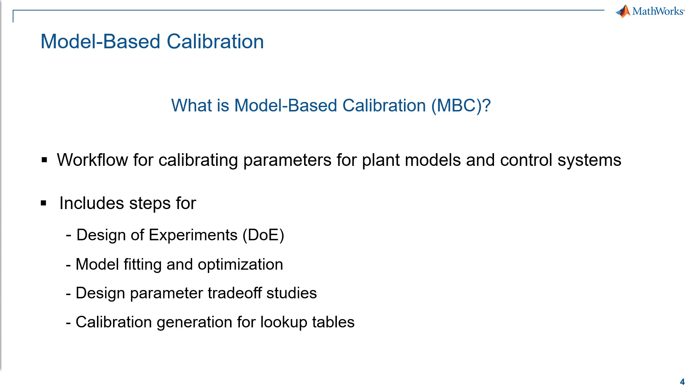For the rest of this video, we'll use the speed-based lookup table calibration as an example and provide a hands-on training to walk you through the entire process. Let's get started.

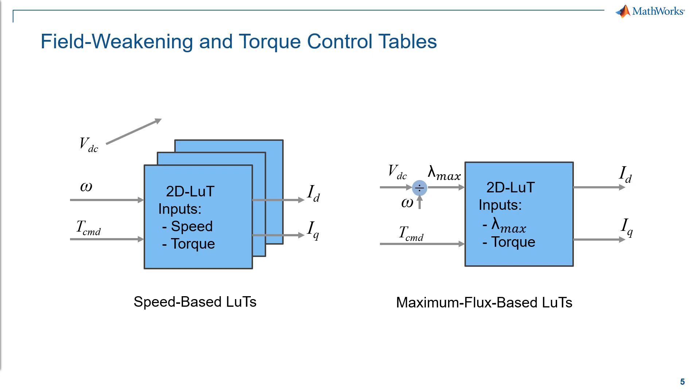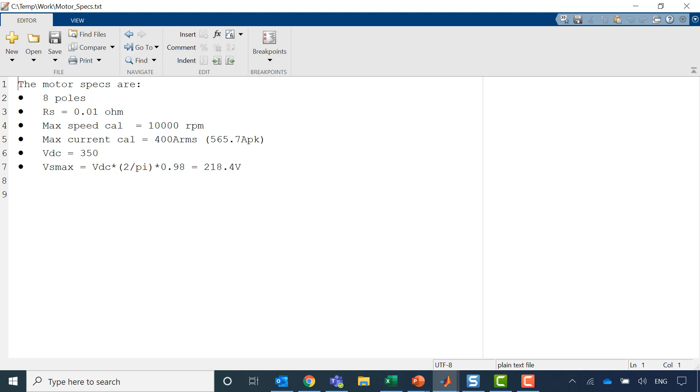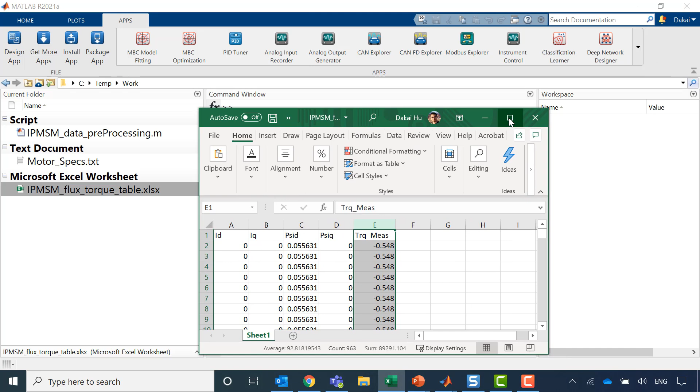We're also going to take a look at the raw data. Here in this case, the DOE is already done and the tests are also done. The raw table that you're looking at is basically the test data. So we have ID and IQ, corresponding flux D and flux Q. And the last column here is the measured torque. The Model-Based Calibration Toolbox doesn't accept the data format like this, so we have to rearrange it to a different format.

What we are doing here is that we are using a simple script to read the raw table, and then we are doing some simple calculation to rearrange the table to a different format. So in the end, what you're looking at is a different table that has 6 columns: torque, ID, IQ, and then speed, and then corresponding modulation voltage, which is calculated by VD and VQ, as well as the maximum current, which is calculated by ID and IQ.

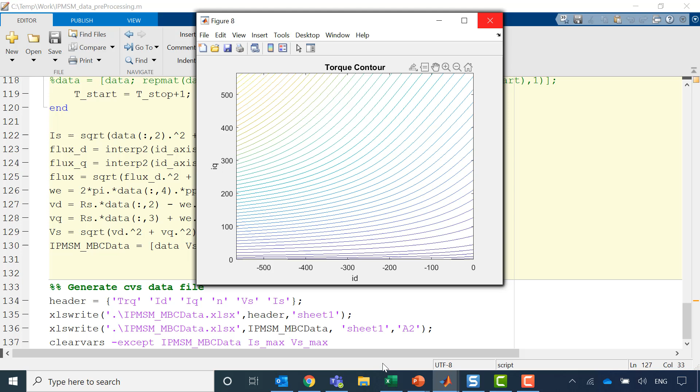So after running this, click run, and this will generate a new Excel spreadsheet called IPMSM_MBC data. Okay, that's the new data sheet generated. So you'll see that here we have 6 columns: torque, ID, IQ, different speed levels, and voltage VS and IS.

So from here, now we are ready to import the data into the Model-Based Calibration Toolbox. Where can you access the Model-Based Calibration Toolbox? If you installed the Model-Based Calibration Toolbox, you can go to Apps and then scroll down here, go to the Automotive section, and you will find 2 apps. One is called Model-Based Calibration Model Fitting, and the other one is called MBC Optimization.

So we are going to use both apps, and we'll first use the MBC Model Fitting tool. So let's launch that. With the MBC Model Fitting tool, the workflow goes from left to right. In our case, since we already have the test data, we are going to skip the design experiment step. I'm going to go directly to the import data step. Before that, let's create a new project. So click New Project. So that's created. And then click Import Data.

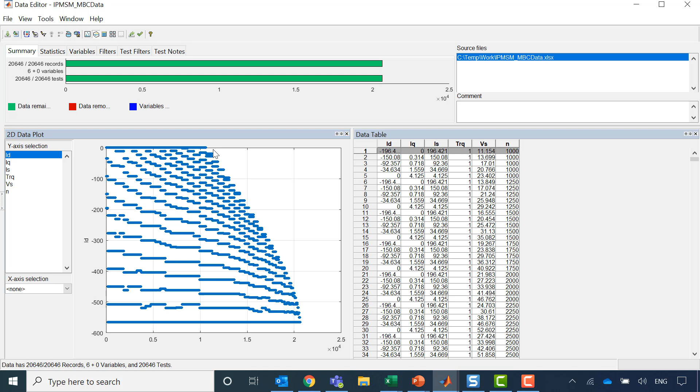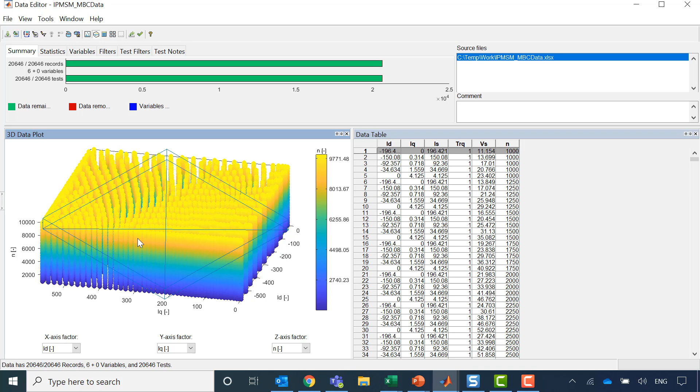So I can look at, for example, ID, IQ, and choose speed as the z-axis. It looks like in our raw data, we have the same kind of data for each speed. We know that certain operating points are not achievable in the raw data. So what we are going to do here is to create a filter or multiple filters to filter out operating points that are not achievable.

To create filters, you can highlight here filters and then right click, add filters. In our case, we know that we have voltage constraints and current constraints. So I'm going to highlight VS, which is the voltage. And then this modulation voltage, we know that it has to be smaller than or equal to the maximum, which is 218.4 volt. So here I am going to add a 20% margin to that, and I'll explain why we need that later if we have time.

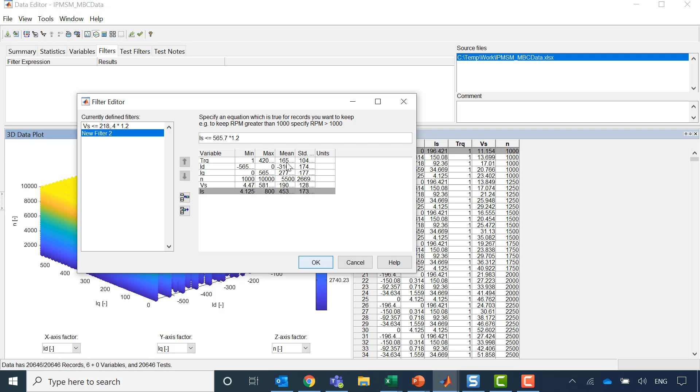The same goes for current. So for current, we need this to be smaller than or equal to the maximum current, which is 400 RMS, and that is 565.7 peak. So times 1.2, again giving it a 20% margin. And click OK. Looks like I've got a typo here. So 218.4. Okay.

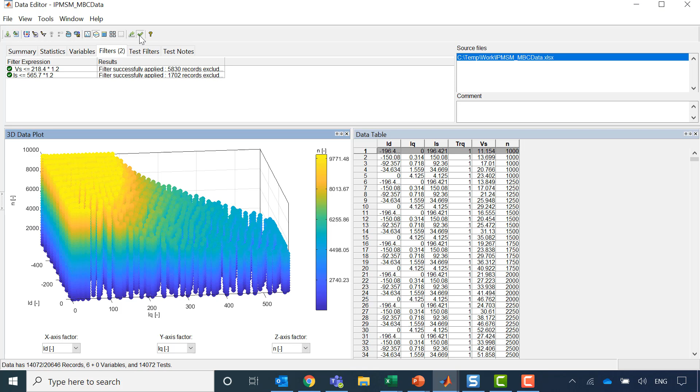Now you'll see that the data looks better. At high speed, the operating areas are smaller than the operating areas at lower speed. This is because at high speed, a lot of the ID, IQ operating points are filtered out because they either violate the voltage constraint or the current constraint. Moving on from here, we can click accept, the check mark here. So the raw data is now imported into the tool. We move on to the next step, which is to fit models.

In our case, we are going to fit the point-by-point model, and the response in this case is IQ and the modulation voltage Vs. The local inputs, we are going to use ID and torque. The operating point is speed. And we're also going to check this box, which is to use default models for large data. In our case, we have more than 10,000 data points even after filtering. So that's a pretty large data file.

Once we check this box, the model fitting process will only fit one kind of model, which in our case is the Gaussian process model, instead of fitting 4 different kinds of models to the data. So from here, we click OK. You will see this window popping up. What this window does is it allows you to group different tests into the same test.

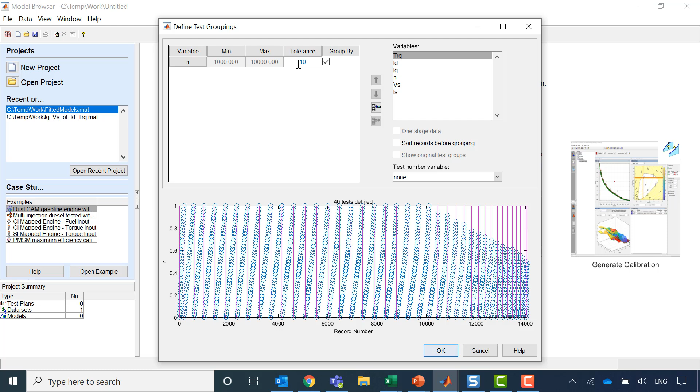For example, if your dyno measures speed around 1000 RPM, and the next set of measurements comes in at 1001, 1003, 1005 RPM, and if you set this tolerance here to be 10, then plus minus 10 RPM will be considered the same RPM testing operating point. So all these 1001, 1003, or 1005 operating points will all be grouped into the 1000 RPM testing point. Okay, so in our case, we choose 10 as the tolerance and then check sort records before grouping.

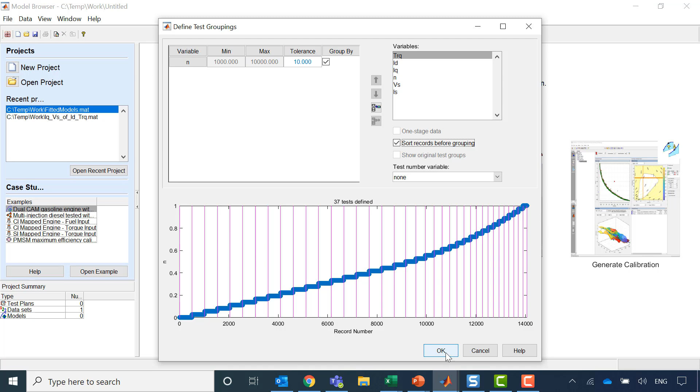In our case, remember we are calibrating from 1000 to 10,000 RPM with increments of 250 RPM. So we ended up with 37 tests or 37 operating points defined according to the speed. Okay. So once we click OK, now the tool will start the model fitting process. And this process will take approximately, in my case, 3 minutes. And this is based on your number of operating points, your number of test points.

So I have over 10,000 test points. And the time it takes to finish the model fitting is in direct proportion to the number of testing points cubed. I have 4 workers on my laptop, and I'm using the Parallel Computing Toolbox, which is utilizing all 4 workers at the same time. And this will take, as I mentioned earlier, about 3 minutes. So in the video, I'm going to speed this up.

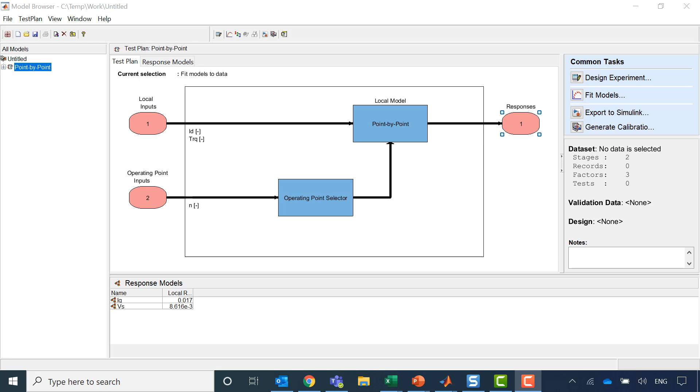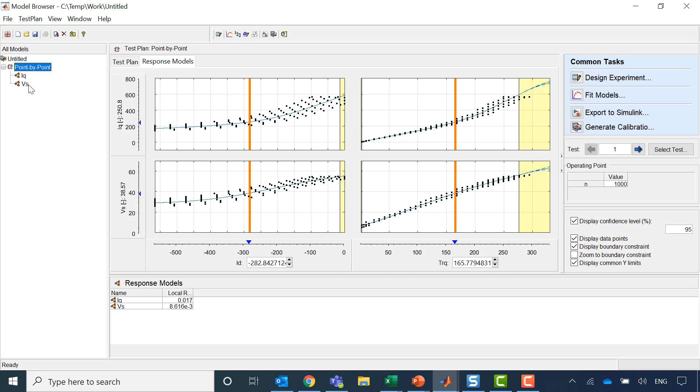Now the model fitting process is finished. Let's take a look at what we get. So here we have 2 responses. One is IQ and one is VS. Click IQ and these are the models. So for each operating point of speed, we end up with one model of IQ, right?

So here if you select test, you will see that different operating points are arranged here, and then we can highlight, for example, at this operating speed, and click OK, and this is the surface of IQ. The same goes for VS, because for each operating point of speed, we have a VS surface. You can also, if you like, right-click and then print to figure, so that you can open up a formal MATLAB figure file to look at the fitted models.

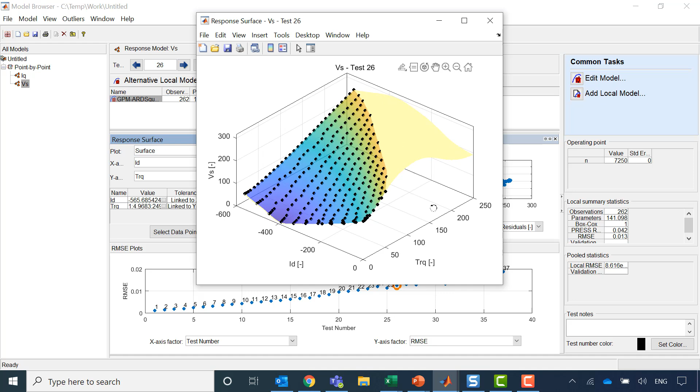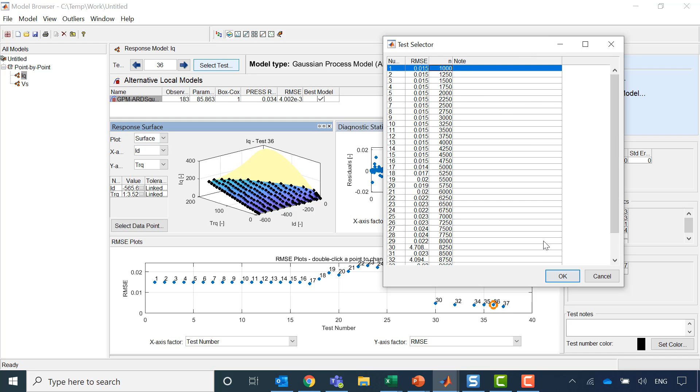Let's also look at an operating point that has high speed. So if I choose a test that has very high speed, let's say 9,750 RPM, and let's choose IQ. You will see that the operating areas are greatly reduced compared with, let's say, a low speed operating point. Select 1000. Right, so you end up with a much smaller operating area on the ID-IQ plane at high speed. This is understandable because at a high speed, your voltage limit ellipse will shrink, and that will limit your variable operating region on the ID-IQ plane.

Okay, we are satisfied with the fitted models. Now let's save them first before we move on to the next step. Just click Save. I'm going to give it a name. Call it Fitted Models. This project will be saved into a .mat file. Okay, looks like now it's saved.

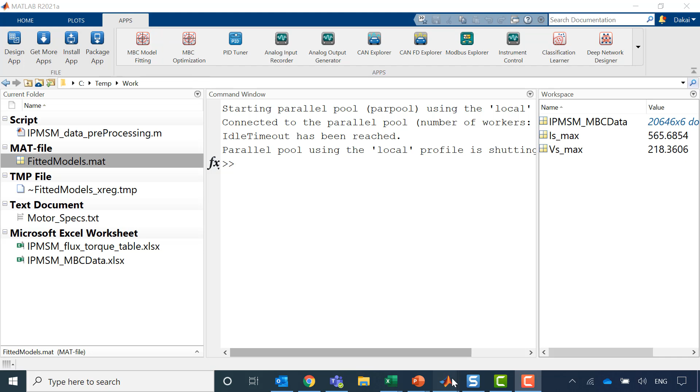Now we are moving on to the MBC optimization. We can open the MBC optimization app from here in the apps section, or we can just go into the model browser that we used to fit the models and go to the top and then open that from here. So generate calibration is essentially bringing up that MBC optimization app. This app is also called CAGE Browser. CAGE stands for Calibration Generation.

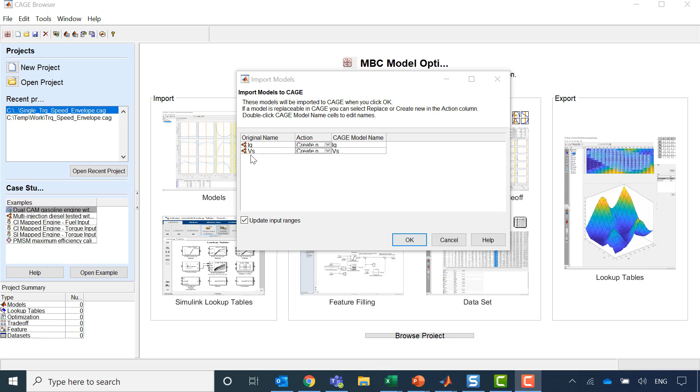Once you're in CAGE, first thing it will ask you to import the models. So in this case, it automatically detects the models fitted from last step, which are the IQ and VS models. So here I'm just gonna click OK, and that will import all the models fitted from the last step. Now you're seeing that the models are inside CAGE.

In this exercise, we're going to do two different types of optimizations. The first one is to calibrate the torque speed envelope under our specified voltage and current constraints. The second optimization is to calibrate the final torque and field weakening control current reference lookup tables for ID and IQ. Let's get started with the first optimization, which is to find the torque speed envelope.

To do that, first we have to create a function model, and this is for current IS. So remember we had IS previously in the raw data, but in this exercise we didn't fit an IS model. We didn't have to because we can easily calculate IS from ID and IQ. So in this case, we're going to do that. IS equals square root of ID squared plus IQ squared. Next, and finish.

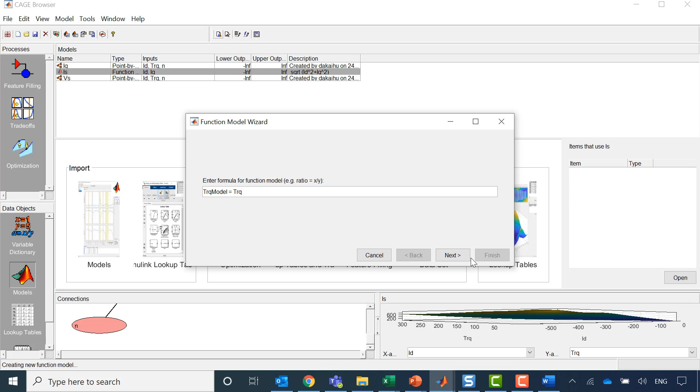We also need to create another function model called torque model. So I'll give it name torque model, and this will simply equal torque. The reason why we need a torque model is because we need a model so that we can run optimization to either maximize or minimize. In this case, we're going to maximize torque model at each operating point of speed. So the maximum torque operating points at each speed point will constitute the final torque speed envelope. Click next, and okay, assign the input automatically assigns the original torque as the input, and we're going to click finish.

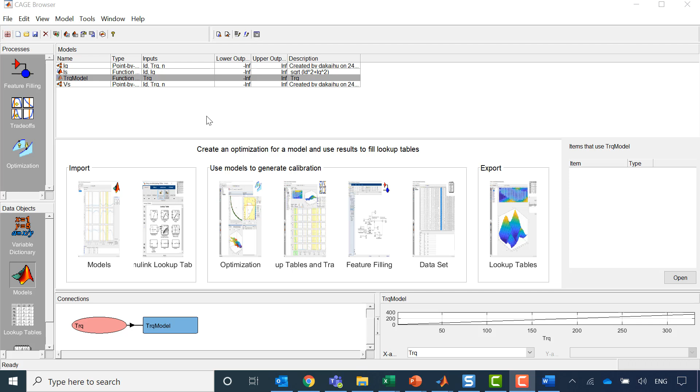After creating the two function models, before we can create an optimization, first we need to create a table that contains all the optimization points. So we're going to go to File, New, 1D lookup table, and I'm going to call it torque envelope table. Select speed. Speed is the table operating points. And we're going to go from 1,000 to 10,000. In this case, remember initially when we grouped the tests, we have 37 tests. So just put 37 here.

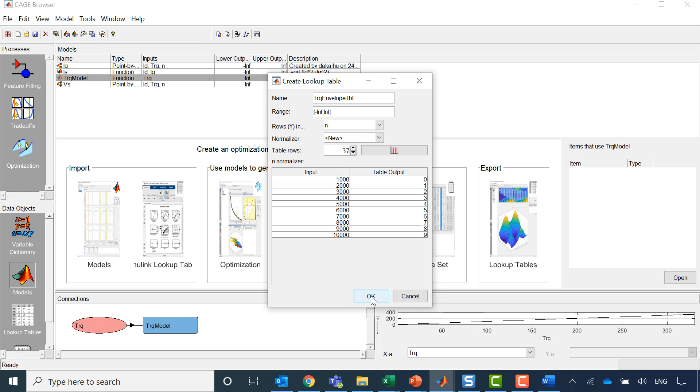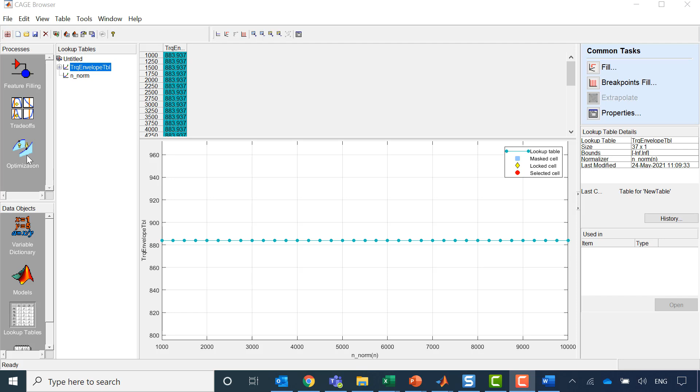These are the operating points that will hold the final optimization results. We're starting at 1000 RPM and it goes all the way to 10,000 RPM at increments of 250 RPM. Now we have prepared everything. We're just going to go to optimization and then from here create an optimization. In this optimization, we're going to maximize torque model. So highlight torque model, click next, and then select here maximize.

You can choose different algorithms for your optimization. In our case, the default is fmincon, which is the most commonly used local optimizer. And for certain cases, you can choose to use a global optimizer if you have installed the Global Optimization Toolbox. Things like pattern search or genetic algorithm. Okay, now we can click finish.

At this page, we work from top to bottom. On the top here, the objective is already set up, so we're trying to maximize torque model. And then we also need to tell the optimizer what the constraints are. In our case, we have two constraints, current and voltage.

So the current has to be smaller than or equal to 565.7 ampere. This is the peak phase current. Click OK. And the voltage has to be smaller than or equal to 218.4 volt. This is the phase modulation voltage.

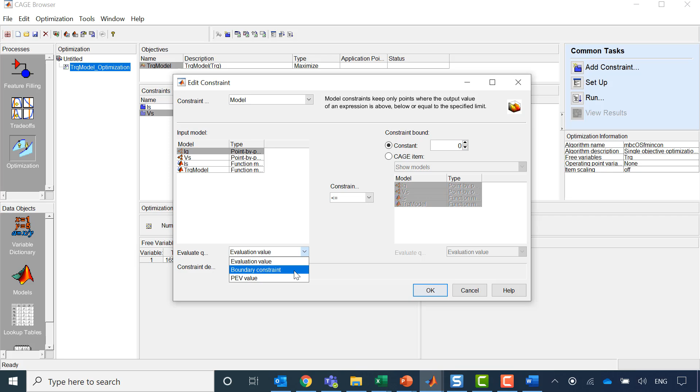What we also need is to add a boundary model. Remember when we create the models, we have the IQ model and the VS model. We have to select either one and then choose the boundary constraint, because if we don't select the model boundary as a boundary constraint, then the optimizers may search areas that fall outside of the model boundary.

Now we have set up all the constraints, and the last thing we have to do before we run the optimization is to set up the free variables and fixed variables. The fixed variables are essentially the speed operating points, and the free variables are ID and torque.

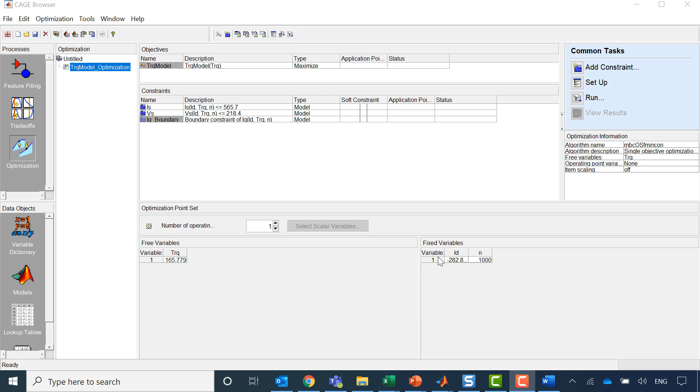What we can do is go to optimization and click select variable or select free variables, and select torque and ID as the free variables, and leave the speed blank, so that speed will be automatically selected as the fixed variable.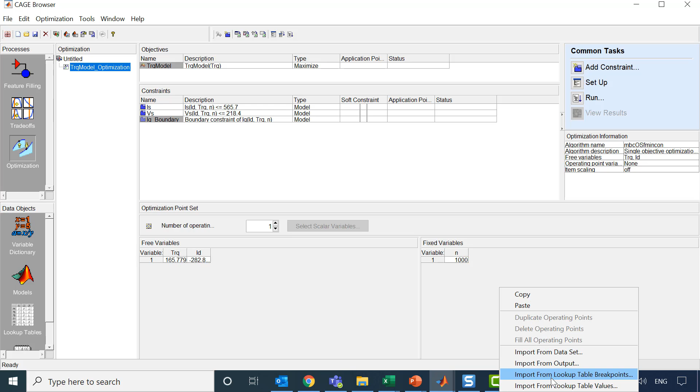By default, there's only one operating point. We need to import all the operating points we want to run for optimization. So we have to right click and select import from lookup table breakpoints, and select the torque envelope table, which has 37 operating points of speed. Now the 37 operating points are imported here.

From now on, what we need to do is simply click a button, run, and that will kick off the optimizer, and the optimizer will search on the response surface, trying to find what the maximum torque is at each operating point.

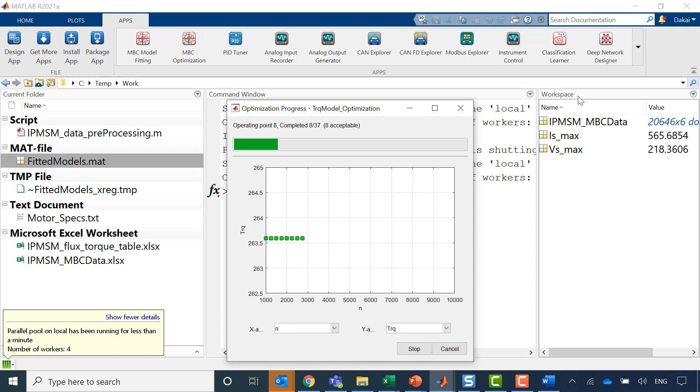Again, here I'm relying on the parallel computing toolbox, and I'm not speeding up the video, because this process is relatively fast. It takes less than 1 minute to finish the entire optimization. Looks like now it's done.

Okay, so this is the final optimization results. I can obviously pop it up to a formal MATLAB figure. And then this is the torque speed envelope that we optimized.

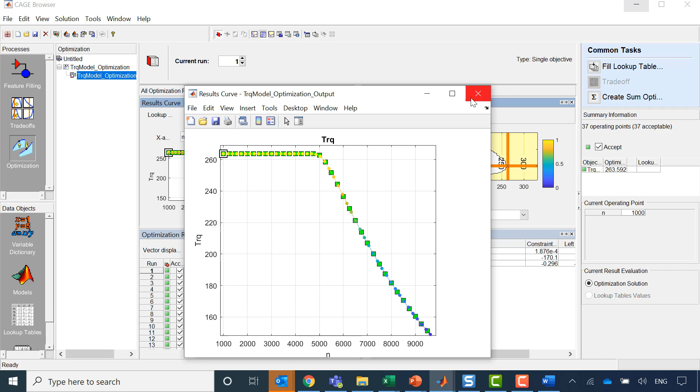And then from here, we need to fill these optimization results to the tables that we created. Well, one table only, right? The torque envelope table. So we click fill lookup table and highlight the torque envelope table we just created, and then fill that with the optimization results.

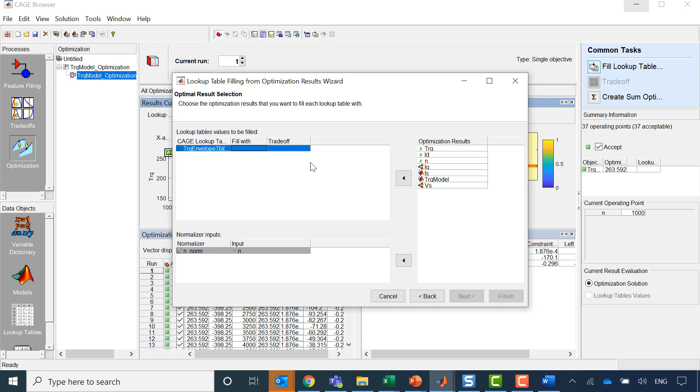Click next. And there are different filling methods. In our case, direct fill, right? There's no extrapolation or interpolation going on. So this is the final table that we are looking for.

We are now done with the first task. Let's move on to the second task, which is to create an optimization to get torque and field weakening control IDIQ lookup tables. We'll have to rely on this torque and speed envelope to create the torque grid used for generating the final lookup tables.

Because in this exercise, we want to use the percentage of maximum torque instead of absolute torque values for the lookup tables.

To do that, we have to first create a torque envelope model, which is essentially a math expression of this torque speed envelope. So let's go to Tables and click Convert to Model.

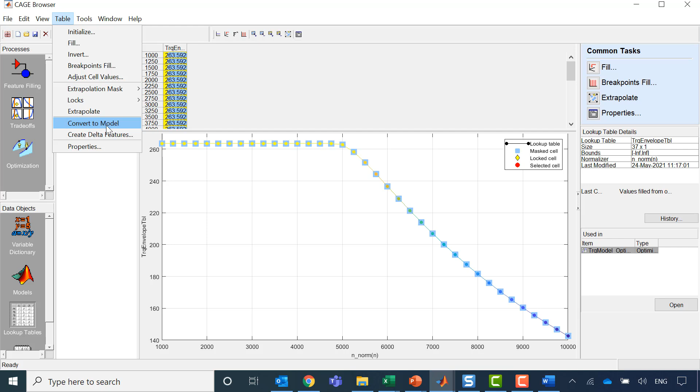Click OK. Actually, we can name it instead of the original torque envelope table, we can change the name here. Just call it torque envelope. Click OK. Now you'll see under the function model section, there's a model called torque envelope being created.

You can actually see what the model looks like in the lower right corner here.

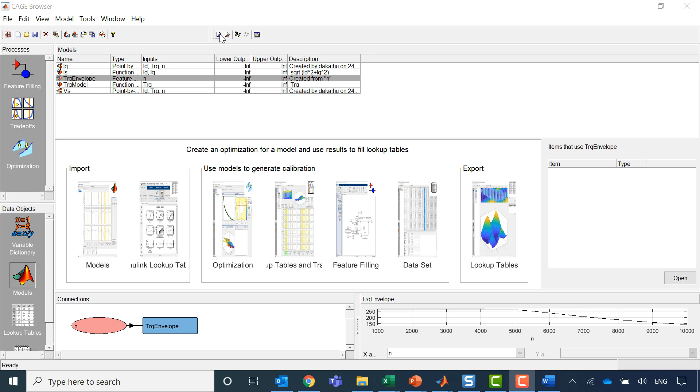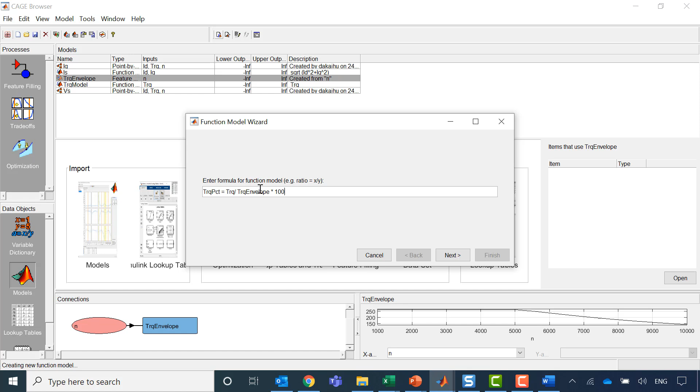Once we have the torque envelope model, the next step is to create another function model named torque percent. Click new function model and type torque percent. This function model is calculated by the original torque from the raw data, divided by this torque envelope table or model, and then times 100. Click finish.

With this new function model called torque percent, now let's create a table based on this torque percentage. So we can go to Tools, create lookup tables from a model, then click Next.

Here we have to select speed as the row input and torque percent as the column input. For the speed, the normalizer is the norm speed, which we created earlier, starting from 1,000 all the way to 10,000 RPM with increments of 250 RPM.

For the torque percentage, we have to create our own grid. In this case, click this button, and we're going to use a freeform vector starting with 1%, then 4% with increments of 4, all the way to 100% of maximum torque.

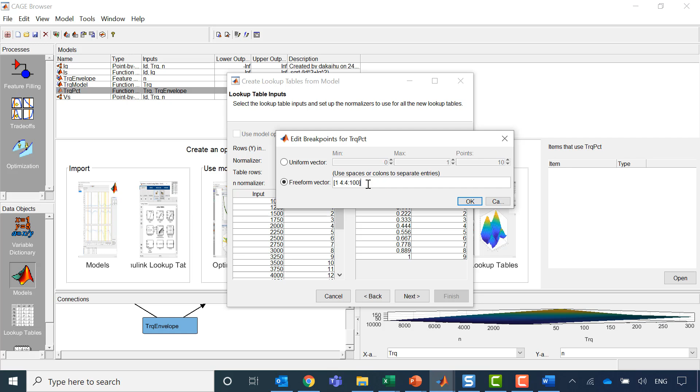The reason we don't want to start from 0% is because when the torque is 0, there's no way the optimizer will be able to find a single operating point that can satisfy this objective to achieve maximum efficiency or TPA, which we'll explain later. Therefore, instead of using 0, we use 1% of the maximum achievable torque.

Click OK, and click Next. Now the table is created.

Now let's go back to the Model tab. We still have to create another function model named torque grid. Torque grid is the absolute torque calculated by torque percentage and the torque envelope.

Let's go ahead and create a new function model and type torque grid equals torque percent underscore input. This is an automatically created variable once we create the torque percent. Torque percent underscore input is essentially a number from 1 to 100 that represents the percentage of maximum torque. So torque percent underscore input divided by 100 gives us the actual percentage, and then times the torque envelope.

So this is the torque grid. Click Finish.

From here, we have done all the preparation work. We created all the variables needed and all the function models needed. Now the last thing we need to create is called TPA, torque per ampere, used as the surrogate to indicate efficiency. TPA is calculated as torque divided by current.

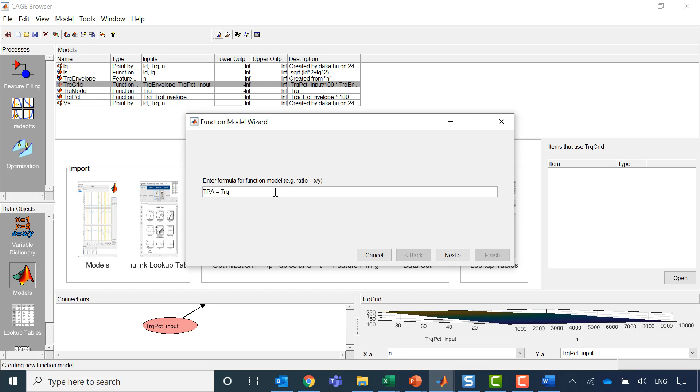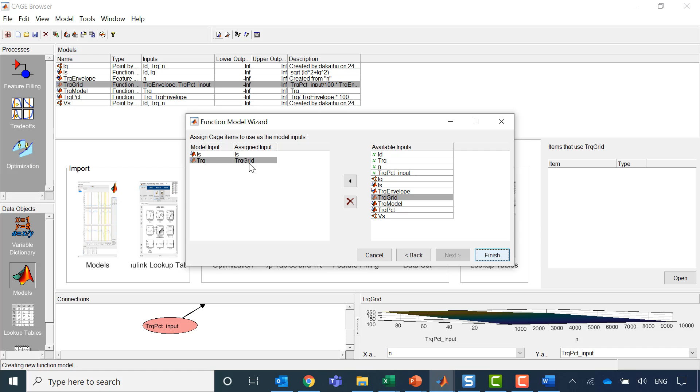Here, torque is actually indicated by torque grid, because torque grid is calculated by the absolute torque percentage times the torque envelope. That's why we replace the original torque with the torque grid here.

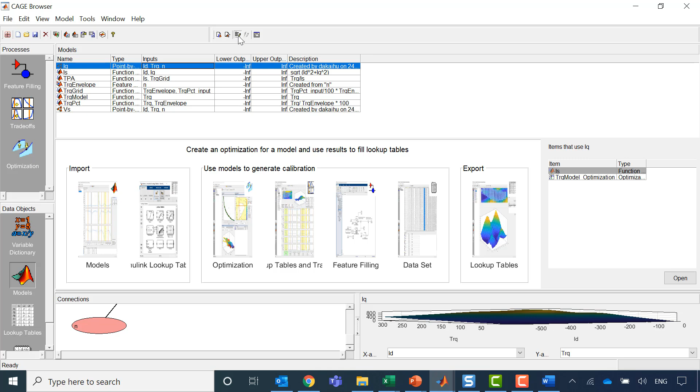What we also have to do is replace the torque inputs for the original IQ model as well as the original VS model with torque grid, the function model we created. So here we highlight IQ and click Edit Inputs, then highlight the torque and use torque grid to replace that. We do the same thing with the VS: Edit Inputs and replace with torque grid.

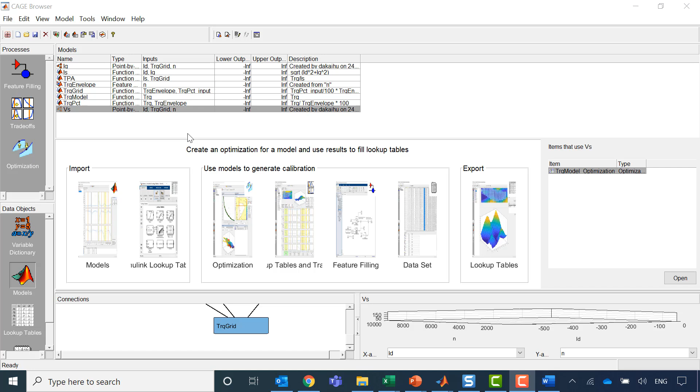Finally, the last thing we have to do before creating the optimization is to create the ID IQ lookup tables that are used to contain the optimized table data. To do that, we highlight IQ and go to Tools and select Create Lookup Tables from Model, and click Next. Here, obviously, the speed is used as rows and torque percentage is used as the columns.

So here select speed norm and torque percent norm. You can see the grids for speed, the same one as before, from 1,000 to 10,000, increments of 250. And for the torque percentage, from 1% all the way to 100%, increments starting from the second, increments of 4.

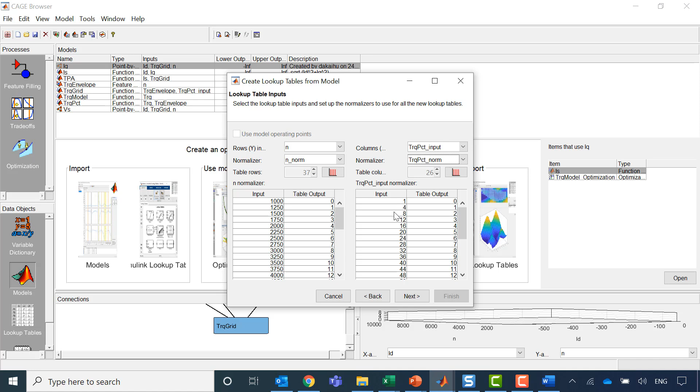Click Next. Create lookup tables for ID and IQ. Click Finish. Now the tables are created.

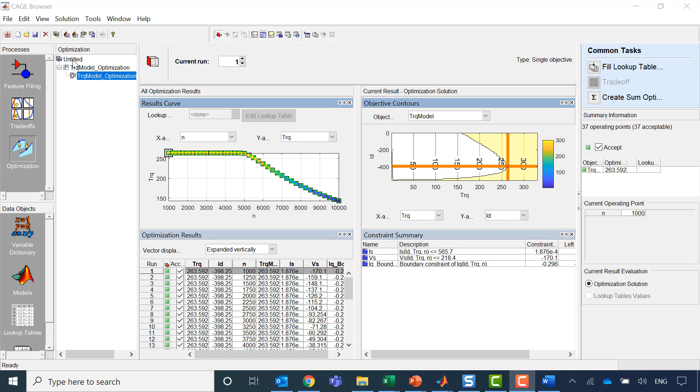Okay, now let's go to optimization. Click here, highlight the original project at the top of the project tree, and then click Create Optimization.

What we're trying to do is maximize the TPA. So highlight TPA, click Next, click Maximize, click Finish. When we are at this page, we're following the same workflow as before, so work from top to bottom.

We already have the objective set up, which is to maximize TPA, and then we're going to add constraints. It comes with the TPA boundary constraints. What we also have to do is create the voltage constraints and the current constraints.

For voltage, the constraint is that this voltage Vs has to be smaller than or equal to 218.4 volts. And then for the current, the constraint is that the current Is has to be smaller than or equal to, I believe, 565.7 ampere. This is the peak one.

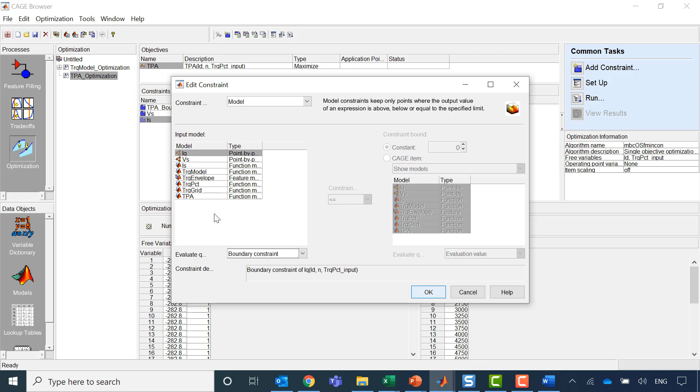What I also want to add is the original boundary of the Iq model. So click Iq, and here we're going to select boundary constraint. Remember, the optimizers cannot go beyond those model boundaries to search for optimized solutions.

Okay, now let's work on the optimization's point set. This is basically your operating points. So we have the torque and speed grid, right? Therefore, the fixed variables are torque percentage and speed.

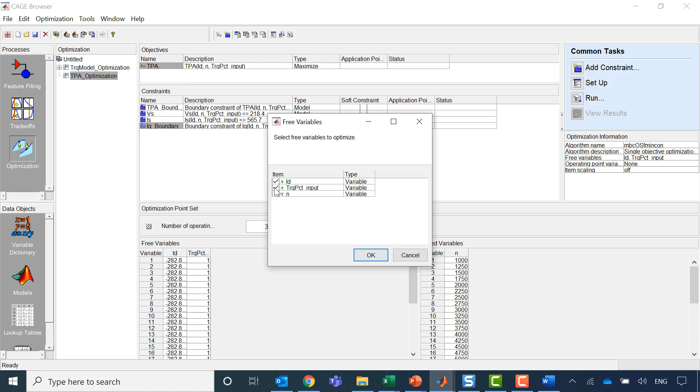And the free variables are basically just Id. So we can go to optimization, select free variables, we select Id, and then automatically the fixed variable here becomes speed and torque percent.

But here is only 37 operating points. We have more than that, right? We have a number of speed operating points times a number of torque operating points. Actually, we have to import that from the tables. Right click here and then click import from lookup table breakpoints. In this case, either Id or Iq table, they're the same.

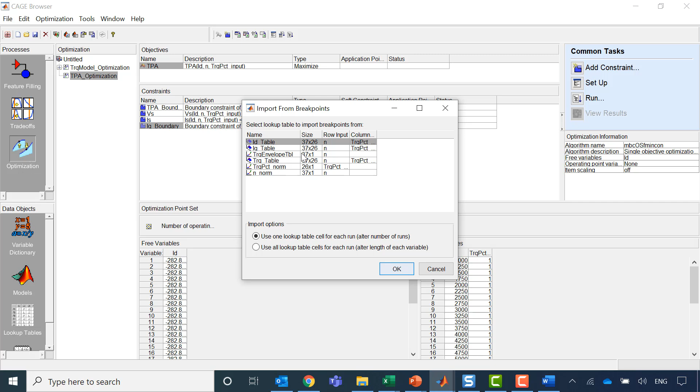So altogether, we should have 37 times 26 operating points or fixed variables. Click OK. Now you'll see the number becomes 962.

At this point, I believe we prepared everything to run this optimization. So all we have to do is go here and click setup. Instead of starting from one point to run the optimizer, what I prefer is to always start from 3 points. This will give us better accuracy.

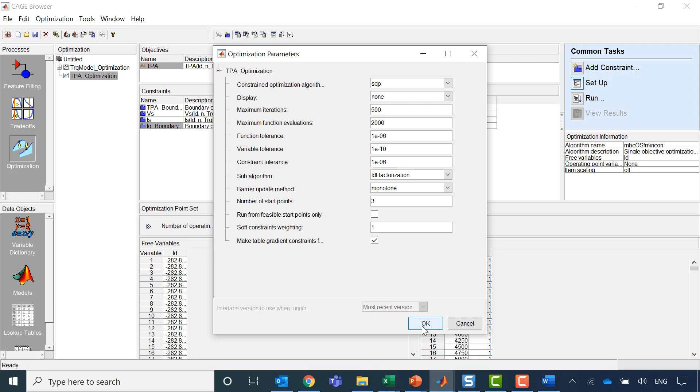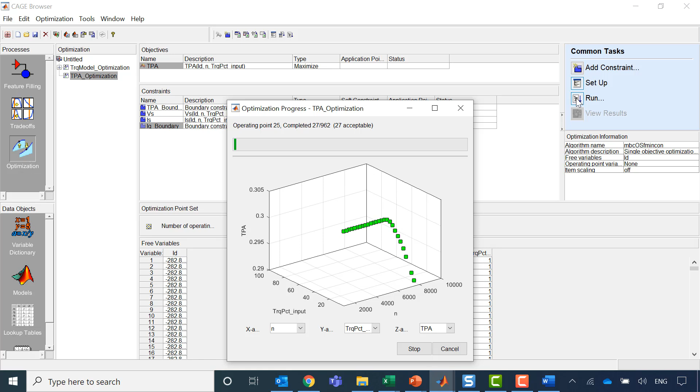So let's click run. Depending on your PC, this process can take somewhere between less than 1 minute to a couple of minutes. In my case, I have 962 operating points and I'm using a four core PC running Parallel Computing Toolbox, and it will take roughly around 3 minutes. So for the sake of this video, I'll just speed up the process here.

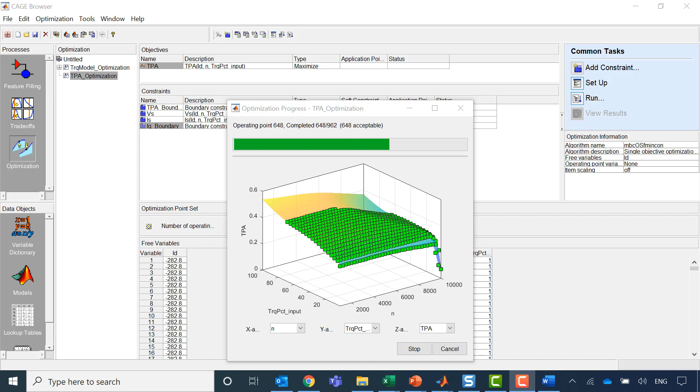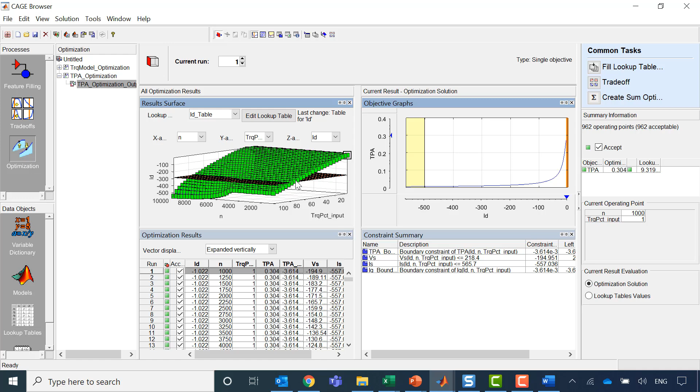Now the process is finished, and you'll see that we have 962 operating points, and we were able to find acceptable solutions for all of them. Each green dot indicates that the optimizer was able to find an optimal solution. We can right click here and print it to a MATLAB figure so you can take a closer look at it.

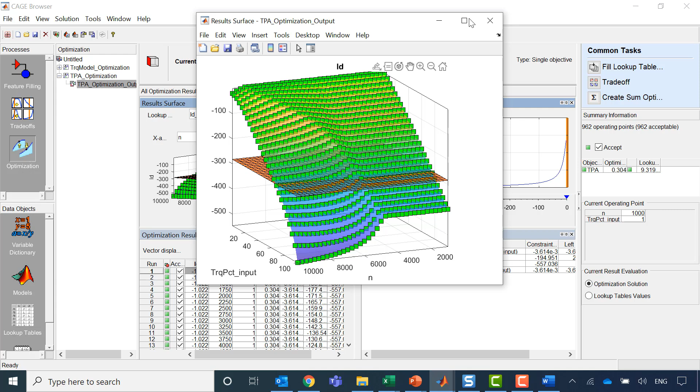Now we have the optimization results. The last step is to fill in the tables we created earlier, the ID and IQ tables. The ID table is already here that you're looking at, and the IQ table we need to fill from here. So ID table, IQ table, click next.

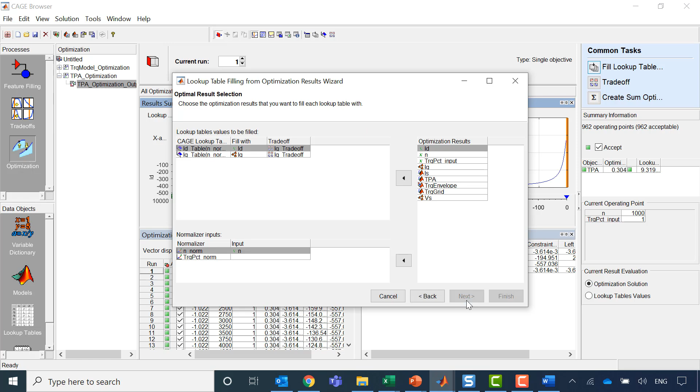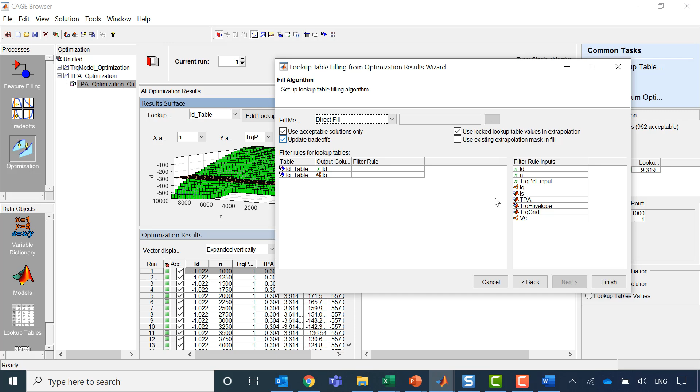Fill with ID IQ, and then the normalizer, which is the inputs for the grid, so speed and torque percent. Click next. In this case, we're still going to use a direct fill because we don't want to extrapolate or interpolate. Click finish.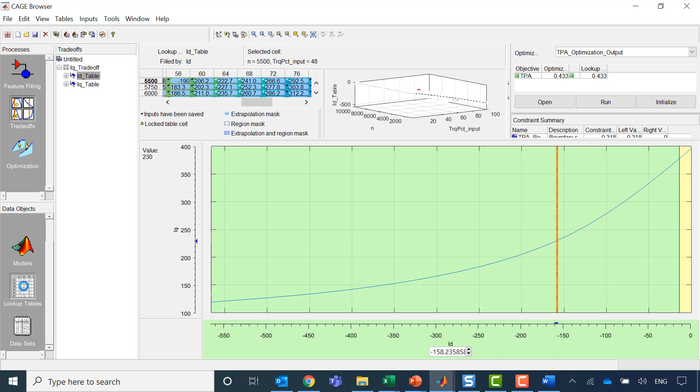You will see the results here under the table section. Right here, click lookup tables, and click—this is the Id table. If I click IQ, this is the IQ table. I can also right click and print to figure.

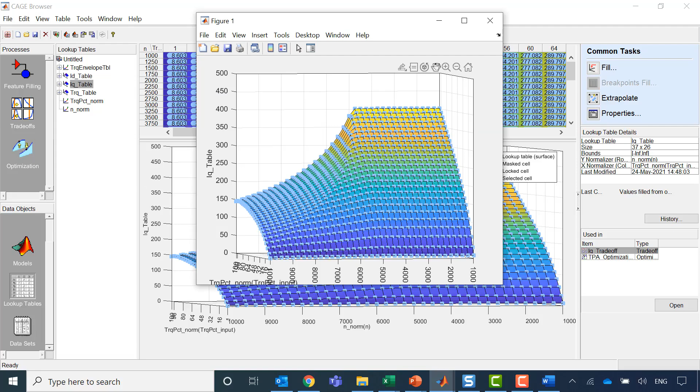As you can see, on the x-axis this is speed, starting from 1,000 to 10,000 with increments of 250. On the y-axis, we have torque percentage, from 1% all the way to 100%. This is based on the torque speed envelope, which means that at 10,000 RPM, that operating point corresponds to a different absolute torque compared to, let's say, 2000 RPM, even though there's 100%. But this 100% is based on the maximum torque achievable at 2000 RPM, and this torque percentage is based on the maximum torque achievable at 10,000 RPM.

So by filling the table in this manner, we make sure that each operating point is viable. There are no operating points wasted. Let's actually take a look at the ID table as well. Click ID, and let's print it to a MATLAB figure.

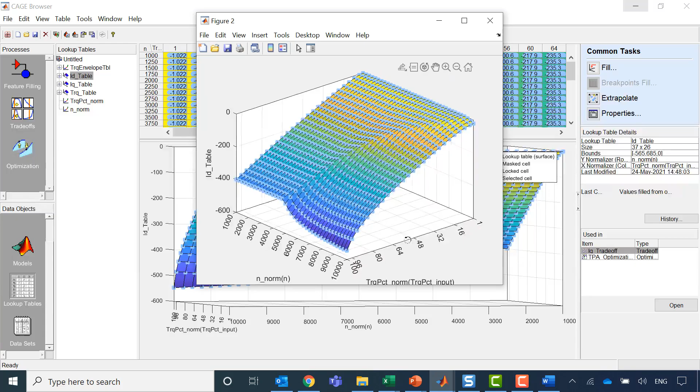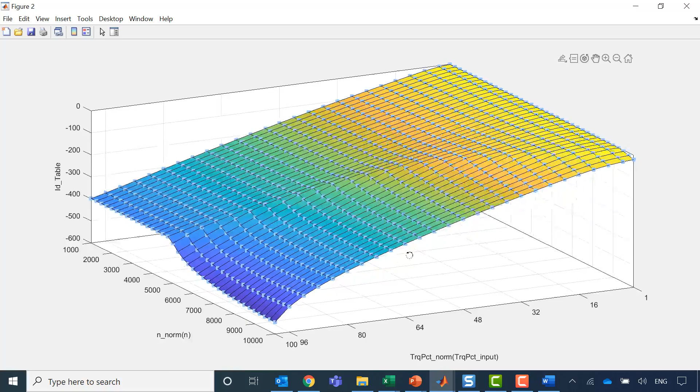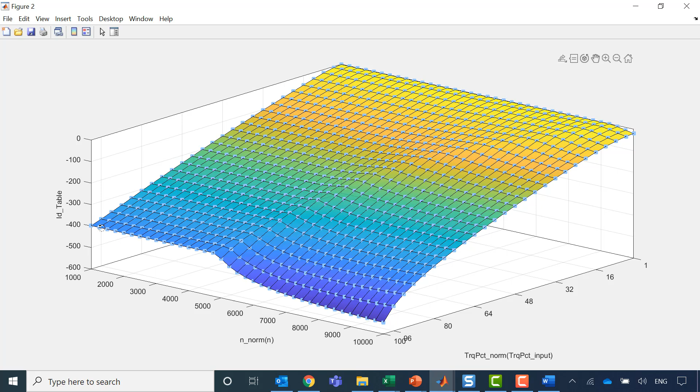On the ID table, you can clearly see that if I rotate this way, as speed increases, first you'll see this flat area, which is below base speed. This is like the MTPA trajectory. Once speed increases beyond base speed, in order to maintain torque, ID increases in the negative direction. So along this line, first MTPA, then increase ID to the negative direction as speed increases. Overall, this area is the field weakening area right here.

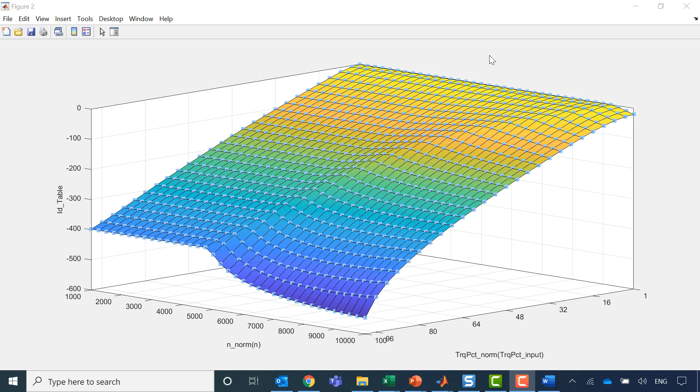Now it looks like we're done with our second task. We already got lookup tables for ID and IQ. The last thing we want to do, if you want to export the calibration lookup tables, you can do that from here. Go to File, go to Export Calibration, and you can export the ID IQ table as well as all the other tables we created.

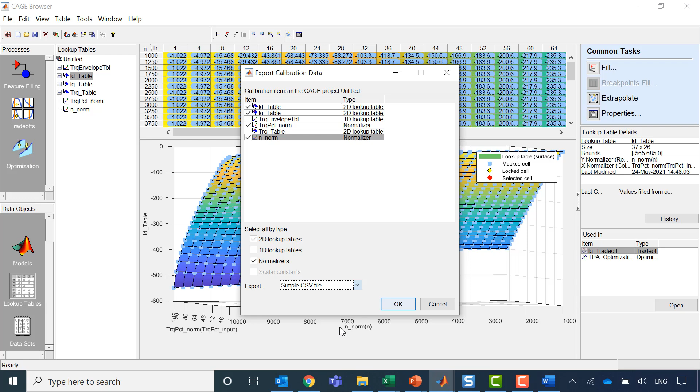In this case, let's say we only care about the ID and IQ tables, and obviously we need the torque percentage norm, which is the inputs of the torque grid, as well as the speed grid. We can do different file formats. Let's do a simple CSV file and give it a name: calibration lookup table, ID and IQ.

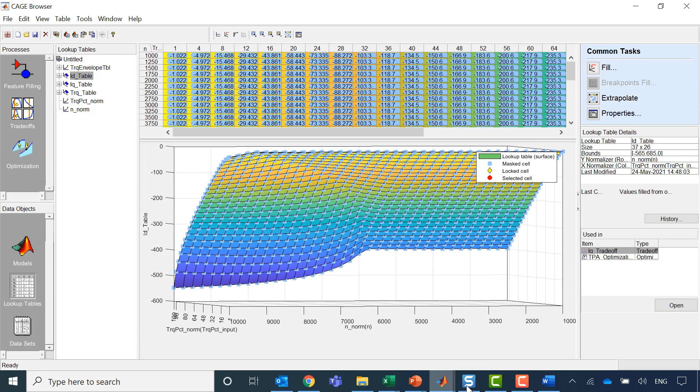Now the table is created. If you look in here, you can open it outside MATLAB. This is just the indices for the inputs, and this is the Id table. I think below here is the Iq table.

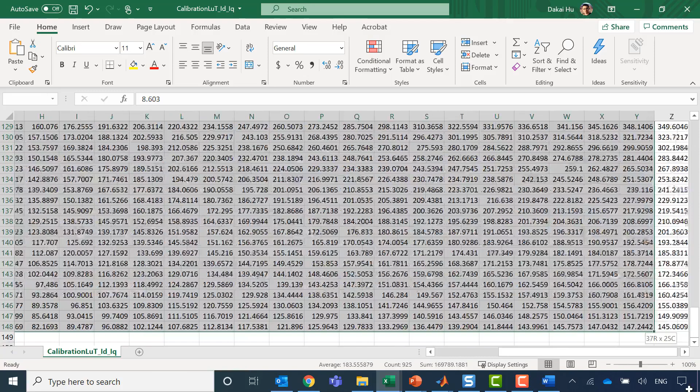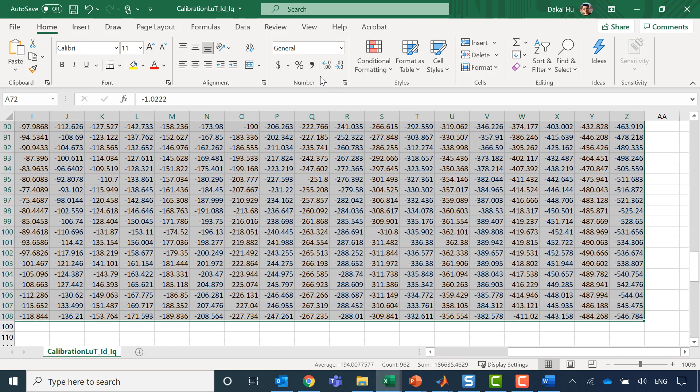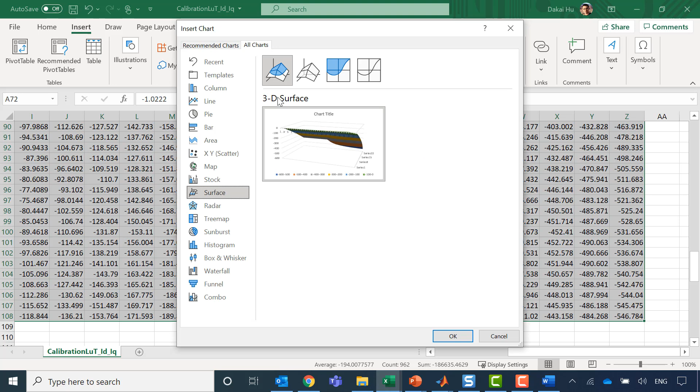Let's see what it looks like if we plot it in Excel. Let's highlight the data for the Id table, go to Insert, go to Charts, and do a surface chart. You'll see the same surface as in the CAGE Browser, but the difference is that here you cannot really rotate it very well.

Now we've completed both tasks. We ended up with two calibration tables we need, the Id table and the Iq table, that has both the torque control and field weakening control lookup table data in it. This concludes our exercise.